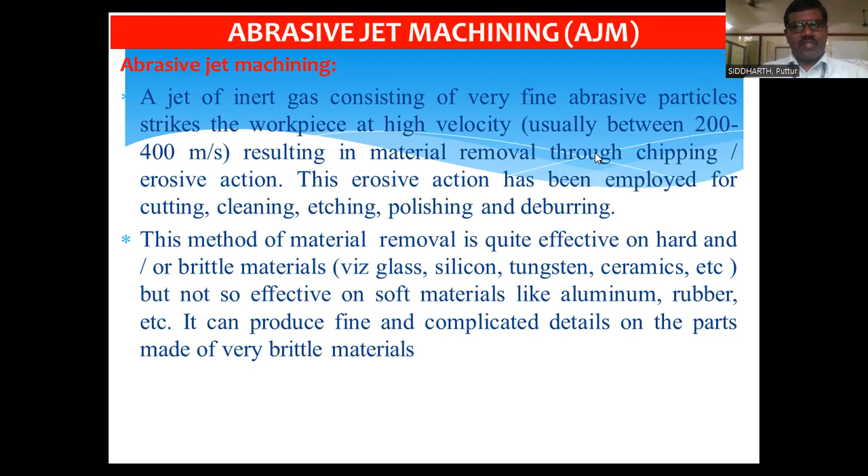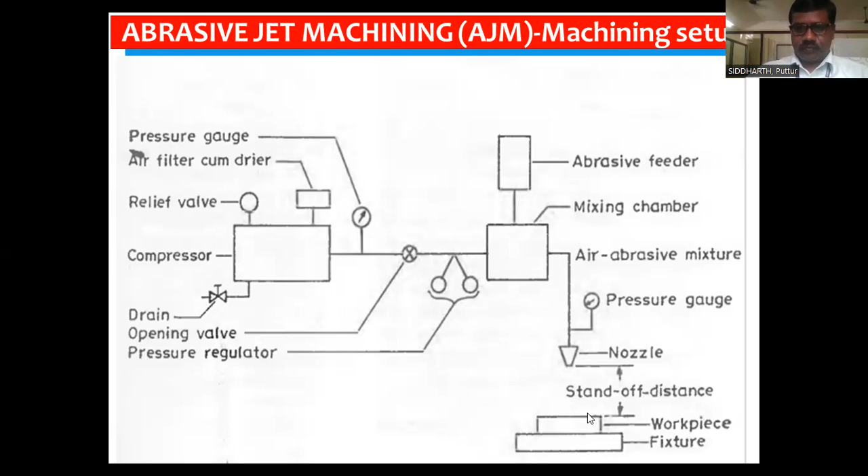Coming to the main components of abrasive jet machining: the first one is the gas propulsion system. The gas propulsion system supplies clean and dry gas, which may be air, nitrogen, or carbon dioxide. This propulsion system supplies clean and dry gas to propel the abrasive particles.

The gas may be supplied either by a compressor or from a cylinder. In case of a compressor, an air filter cum dryer should be used to avoid water or oil contamination of the abrasive powder. So if any oil or humid water particles are present in the air, they will be properly cleaned and dried before entering the compressor. The gas should be non-toxic, available cheaply and abundantly, either in the market or in the atmosphere, and it should not excessively spread when discharged from the nozzle into the atmosphere.

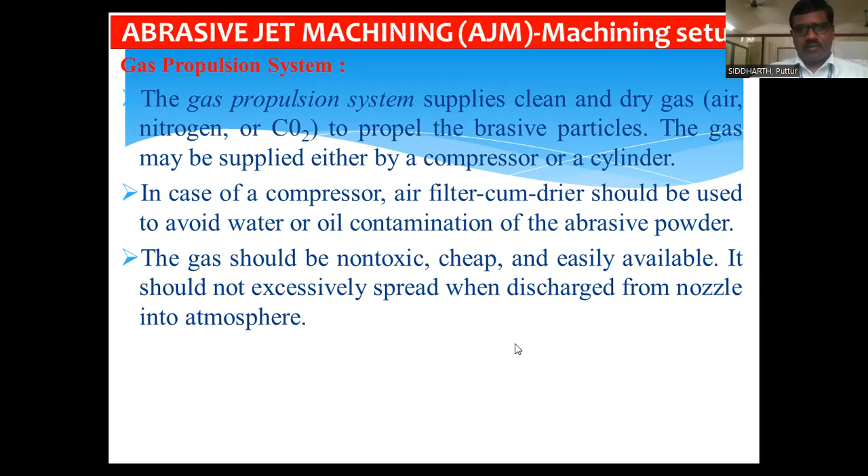Coming to the abrasive feeder, this is required to supply the required quantity of abrasive particles. For machining of any brittle materials, we need to supply air and abrasive particles in a proper quantity, mixing them as needed. According to requirements, the abrasive feeder supplies the abrasive particles into the mixing chamber.

In this setup, the abrasive quantity is controlled by inducing vibration to the feeder. The particles are propelled by a carrier gas into the mixing chamber, where the air and abrasive particles mix and move further into the nozzle.

The nozzle imparts high velocity to the mixture, which is directed at the workpiece surface. Material removal occurs due to the erosive action of the jet of air-abrasive mixture impinging on the surface of the workpiece. So the air-abrasive mixture is properly mixed in the mixing chamber, and afterwards transferred to the nozzle.

The main purpose of the nozzle is to convert high pressure into high velocity, increasing the velocity of the air and abrasive particles. With this high velocity, the abrasive particles impinge over the surface of the workpiece, causing an erosive action. Because of this erosive action, a certain amount of material is removed from the work surface.

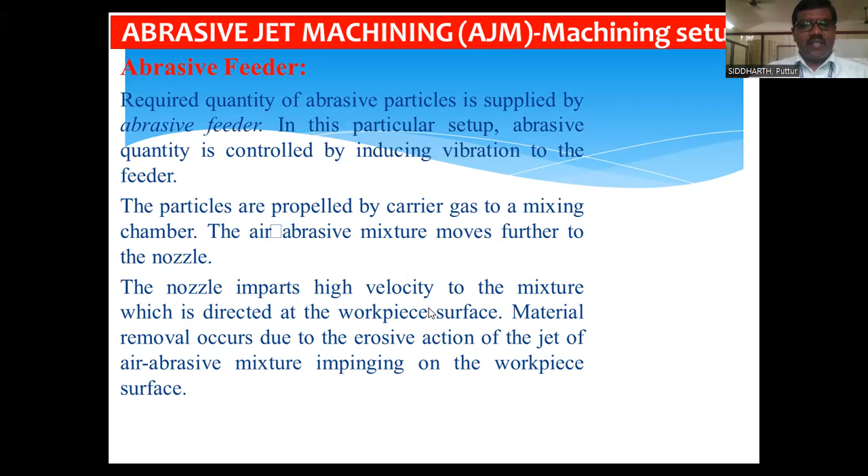Coming to the machining chamber, it is well closed so that the concentration of abrasive particles around the working chamber does not reach a harmful limit. The machining chamber is equipped with a vacuum dust collector.

Special consideration should be given to the dust collection system if toxic materials like beryllium are being machined. Wherever there is a machining chamber, a huge amount of dust is generated during machining, which may affect the operator's health. Sometimes it is very difficult for operators to work with toxic materials like beryllium, so special care like vacuum dust collectors and special consideration to the dust collection system should be given.

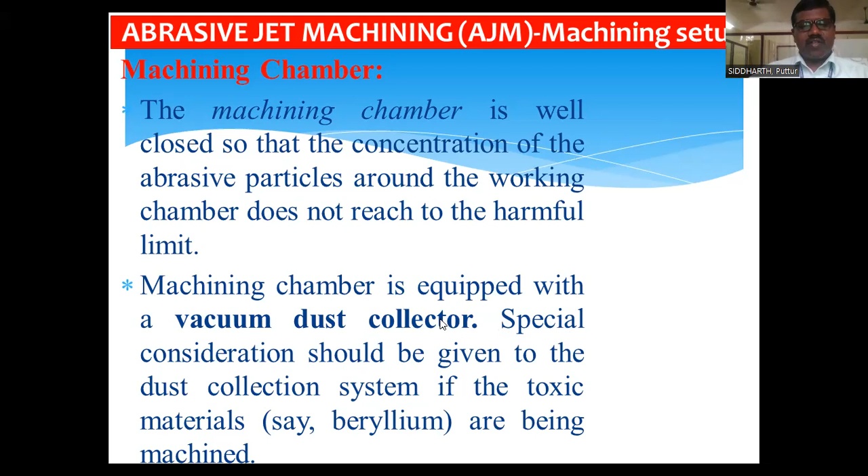Coming to this abrasive machining setup, the AJM nozzle is usually made of tungsten carbide or sapphire. The usual life of this nozzle is 300 hours, after which it must be replaced. This material has high resistance to wear, which is why it is used as nozzle material.

This nozzle is made with either a circular or rectangular cross section, and is designed so that loss of pressure energy due to bends, friction, etc. is minimized as much as possible. The nozzle pressure is generally maintained between 2 to 8.5 kg per centimeter square.

The pressure value depends upon the material of the workpiece and the desired characteristics of the machined surface, meaning the surface finish required, accuracy required, and material to be machined. Based upon all these parameters, we decide how much pressure to maintain while supplying from the abrasive mixer to the nozzle and from the nozzle to the workpiece.

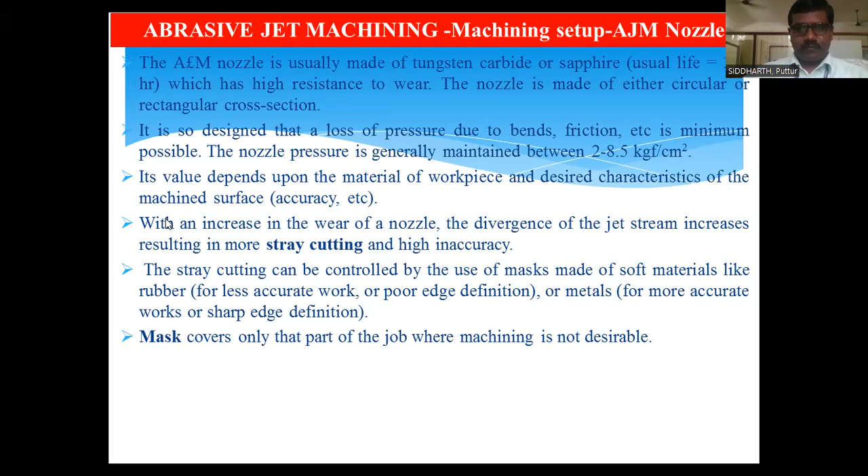This is aluminum oxide, Al2O3, silicon carbide SiC, glass beads, crushed glass, and sodium bicarbonate - some of the abrasives used in abrasive jet machining. The selection of these abrasives depends upon the type of work material, material removal rate, and machining accuracy required.

Aluminum oxide is good for cleaning, cutting, and deburring, while silicon carbide is used for similar applications but for harder work materials. So silicon carbide abrasive particles are used for working hard materials, and aluminum oxide is good for cleaning, cutting, and deburring. For obtaining a matte finish, glass beads are good.

Whenever you require a matte finish, we can use glass beads. But crushed glass performs better for giving sharp edges, so wherever you require sharp edges, we can use crushed glass.

However, cleaning, deburring, and cutting of soft materials are better performed by sodium bicarbonate. So these sodium bicarbonate abrasives are used for cleaning, deburring, and cutting of soft materials.

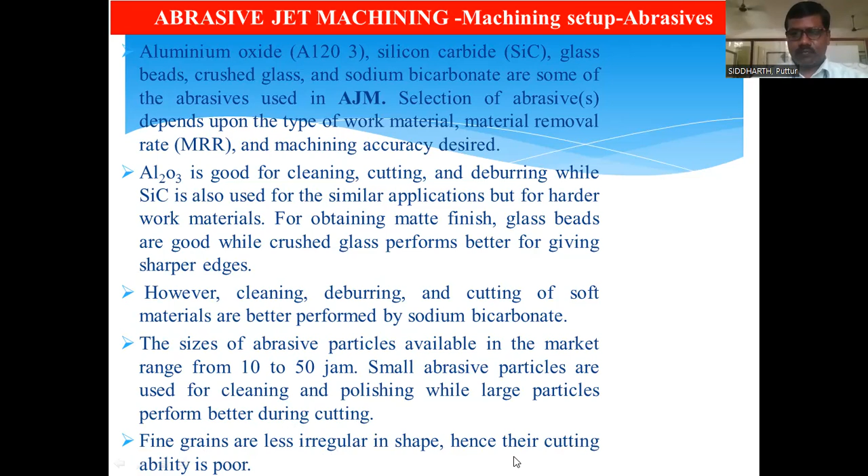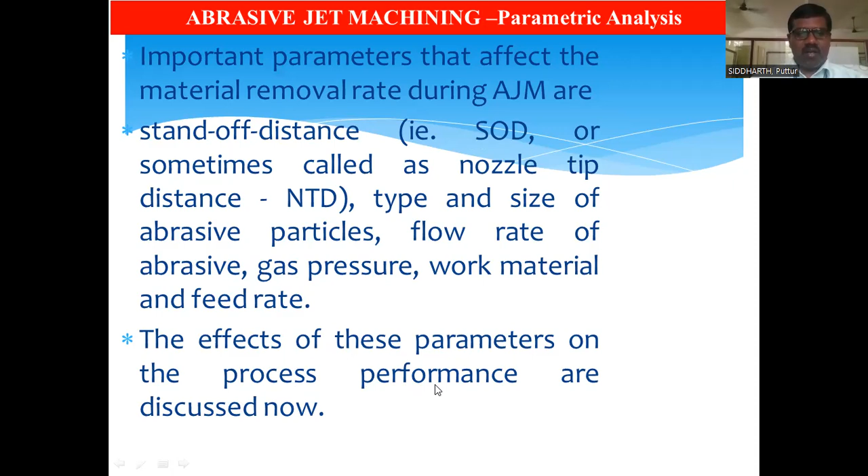Coming to parametric analysis in abrasive jet machining, the important parameters that affect the material removal rate are: the standoff distance or nozzle tip distance, which is the distance between the nozzle tip and the surface of the workpiece; the type and size of the abrasive particles; and the flow rate of abrasives, gas pressure, work material, and feed rate. These are the different process parameters that affect the performance of abrasive jet machining. The effect of these parameters on process performance is discussed in the next slide.

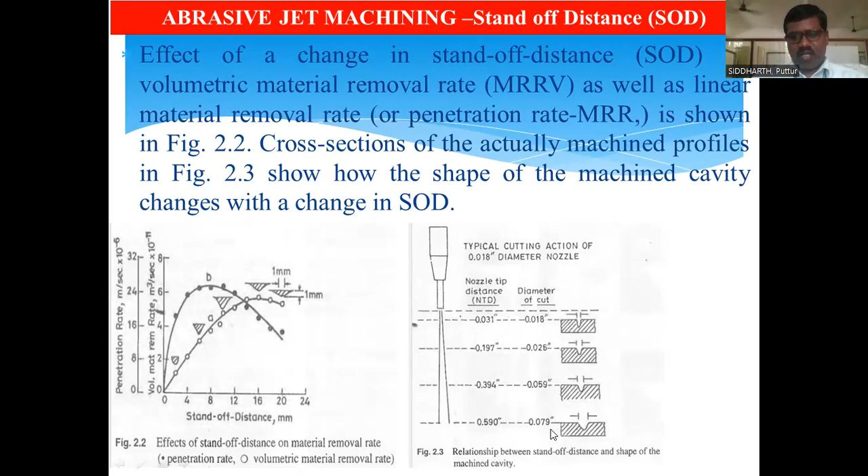The usual range of standoff distance varies between 0.75 mm to 1 mm, and the distance between the nozzle tip and workpiece within this range gives the maximum metal removal rate. As decrease in standoff distance improves the accuracy, it decreases the kerf width and reduces the taper in the machined groove, as shown in figure 2.4.

However, light operations like cleaning, frosting, etc. are conducted with a large standoff distance, like 12.5 mm to 75 mm. Whenever you require a cleaning operation, or want to remove ice in a frosting operation, we can maintain more gap between the nozzle tip and the workpiece, which may range from 12.5 mm to 75 mm.

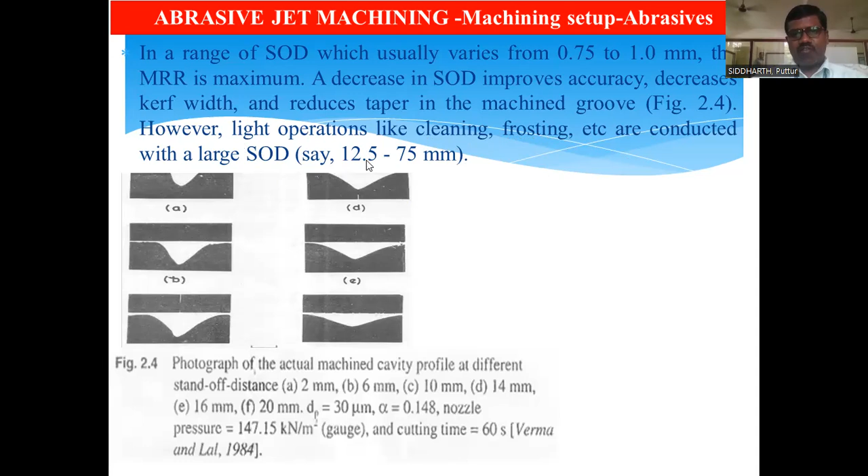Now coming to the abrasive flow rate. How this abrasive flow rate will affect the surface metal removal rate. This metal removal rate increases only up to a certain extent, only up to a certain value of the abrasive flow rate, beyond which it starts decreasing.

See this diagram. The abrasive flow rate increases from 0 to 28. So when it is increasing from 0 to 4, 4 to 8, 8 to 12, automatically the metal removal rate keeps on increasing. Once it crosses 12 grams per minute, the effect or capacity of this abrasive flow rate reduces, so the metal removal rate also comes down. The graph indicates the same thing.

However, with further increasing the abrasive flow rate, the abrasive flow velocity goes down. It decreases the abrasive flow velocity, causing reduced metal removal rate in grams.

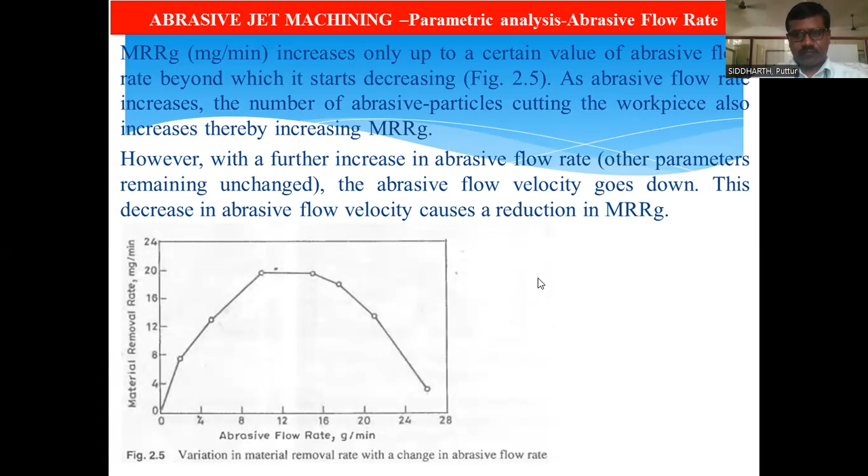And this is the effect of nozzle pressure on metal removal rate in volume, shown in this figure. So if the nozzle pressure is increasing, the metal removal rate is also increasing. This means the kinetic energy of abrasive particles is responsible for the removal of material by the erosion process, as abrasives must impinge on the work surface with certain minimum velocity so that erosion takes place.

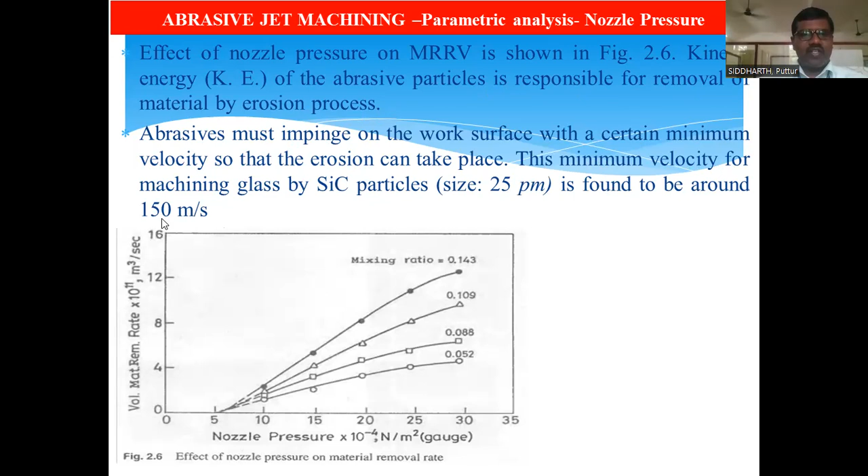The minimum velocity for machining of glass by silicon carbide particles of 25 micrometers is found to be around 150 meters per second.

Now coming to the mixing ratio, meaning how much quantity of air is mixed with how much quantity of abrasive particles. This mixing ratio is very important. It also influences the metal removal rate.

See here, the mixing ratio of 0.268 and the standoff distance with this mixing ratio. This is the mixing ratio: 0.095, 0.148, 0.201, 0.268. Whenever the mixing ratio is increasing, automatically the volume of metal removal rate is also increasing along with the standoff distance.

So if standoff distance increases up to 16 mm, you are going to get the maximum metal removal rate at 0.268 mixing ratio. All these are the mixing ratios. So at 16 mm, almost all give us the maximum metal removal rate. But if we still keep increasing the standoff distance, automatically the metal removal rate comes down.

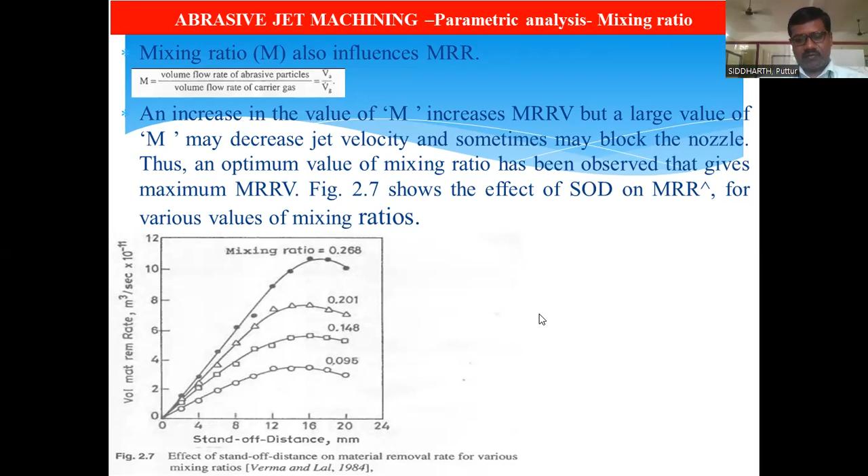Now coming to the process capabilities of abrasive jet machining. Although abrasive jet machining gives low metal removal rate, approximately 0.015 centimeter cube per minute, it can easily produce intricate details in hard and brittle materials. Even though the metal removal rate is less, it gives intricate details in hard and brittle materials which are not possible by conventional machining process.

The production of narrow slots such as 0.12 to 0.25 mm, low tolerance of plus or minus 0.12 mm, good surface finish of 0.25 μm to 1.25 μm, and sharp radius of 0.2 mm on machine edge are some of the characteristics of the abrasive jet machining process.

Steels up to 1.5 mm thick and glass up to 6.3 mm thick have been possible to cut by abrasive jet machining, but at very low MRR and large taper. These are somewhat limitations while cutting glass.

The process has a special application for machining thin sectioned brittle materials, particularly in areas which are inaccessible for conventional machining process. So wherever it is not possible to cut by conventional machining process, we can use this abrasive jet machining process effectively.

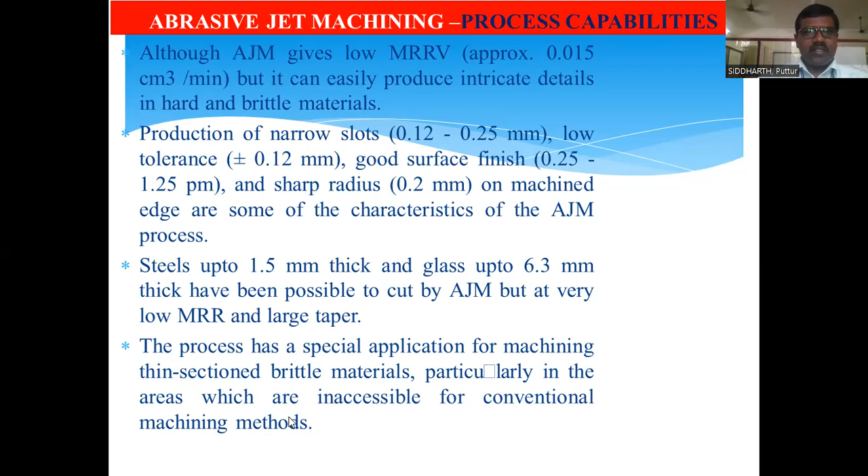Coming to applications, abrasive jet machining is useful in manufacturing electronic devices, deburring of plastics, making nylon and Teflon parts, marking on electronic products, permanent marking on rubber stencils, deflashing of small castings, cutting titanium foils, and drilling glass wafers.

It is also used for engraving registration numbers on toughened glass used for car windows. This process is also used for frosting glass surfaces and cutting thin section fragile components.

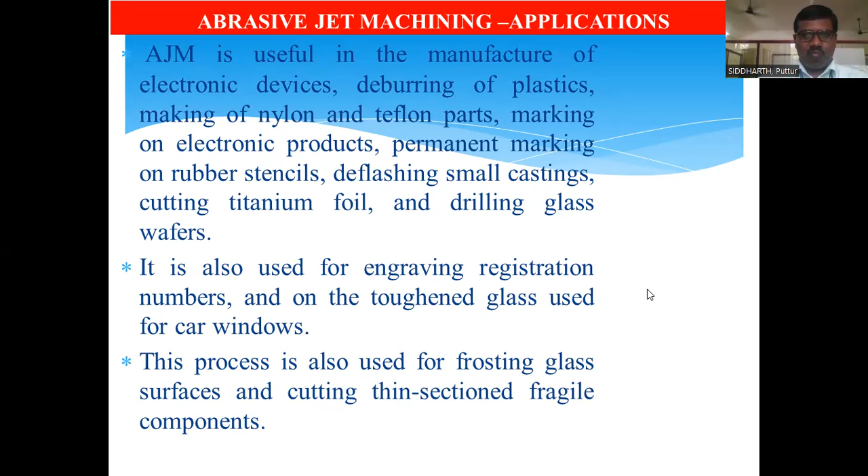Coming to the advantages and limitations of abrasive jet machining, in which a high velocity jet of abrasive particles is made to strike the surface of the workpiece for the removal of material by impact erosion.

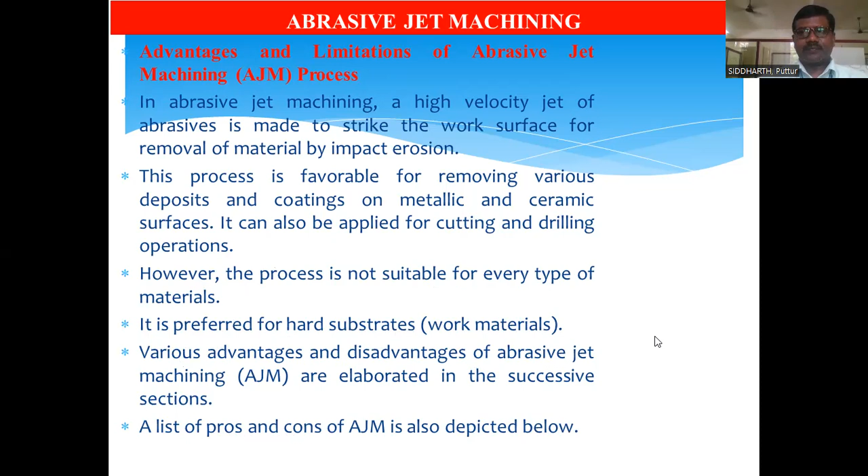So these are the advantages and disadvantages. Abrasive jet machining is suitable for removal of deposits and oxide coatings, and a wide range of surface finish can be obtained. The process is independent of electrical and thermal properties; even for non-conductors, we can easily cut using this abrasive jet machining process. There is no thermal damage on the workpiece, it is suitable for non-conductive and brittle materials, and it has low capital investment.

Coming to the disadvantages: not suitable for soft and ductile materials, abrasives are not reusable, abrasive collection and disposal are problematic, there is tapered and stray cutting and similar effects for drilling operations, and a limited nozzle life.